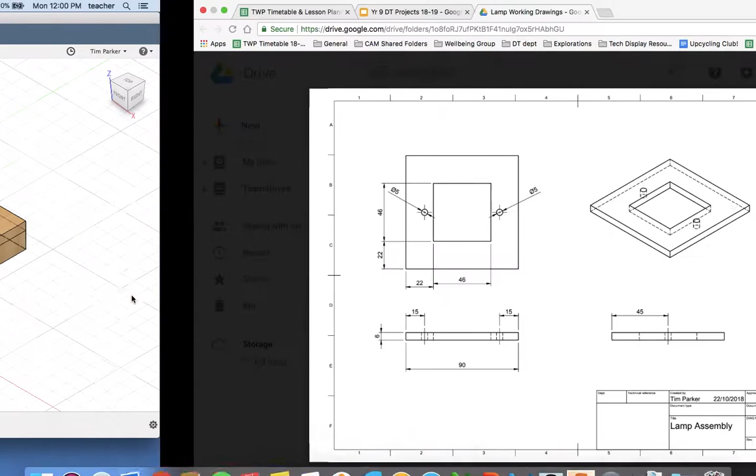So the second last part that we still need to make is the acrylic with a square hole in it. This is the bit that's going to go over the top of the circuit board and let the LED light shine through. For this one, we're doing the same as before, but instead of a circle in the middle, it's a square in the middle.

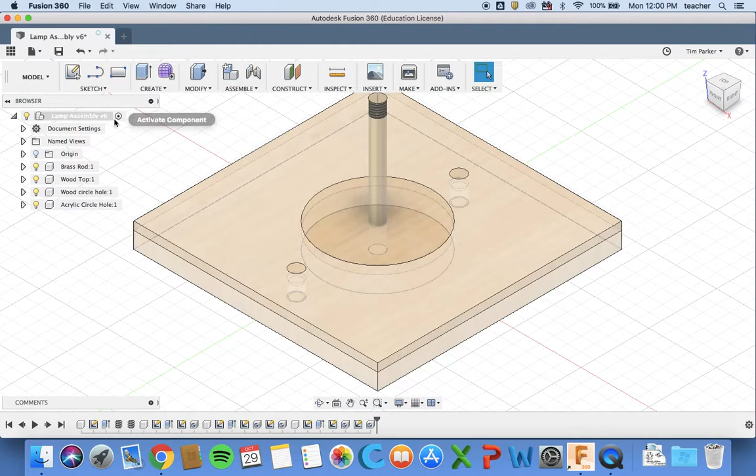So I'm going to make sure I've got my assembly at the top as my active component. I'm going to create a new component, and I'm going to call this acrylic square hole. I'm just going to turn off my other ones so that I don't have to see them. I'm going to create a sketch.

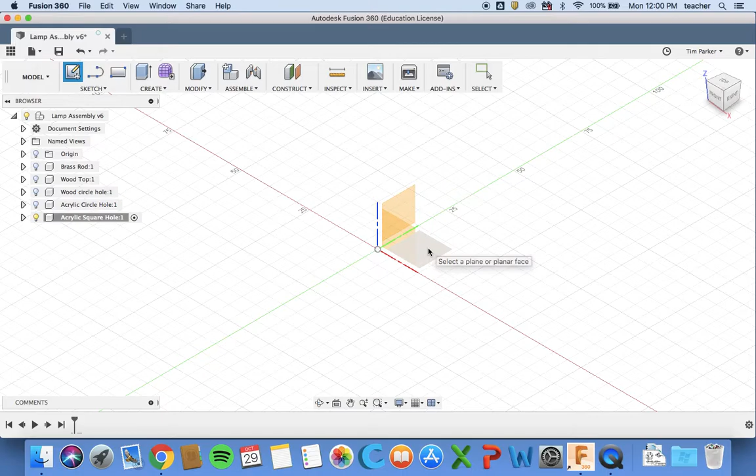So, same drill as before. Okay, I've made my sketch. Now I need to create my rectangle, so center rectangle.

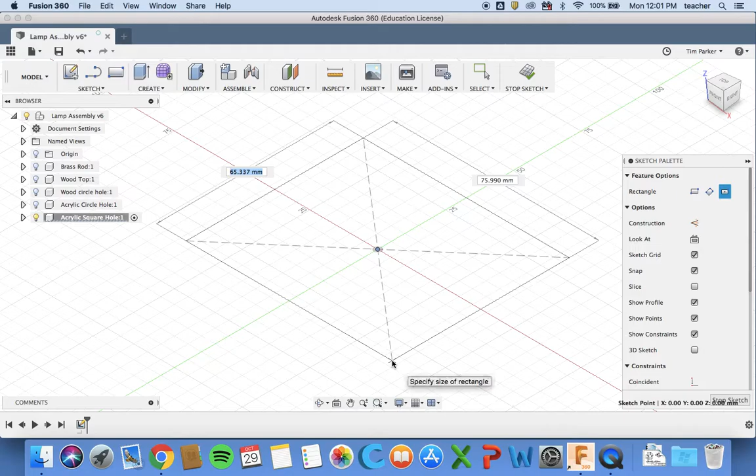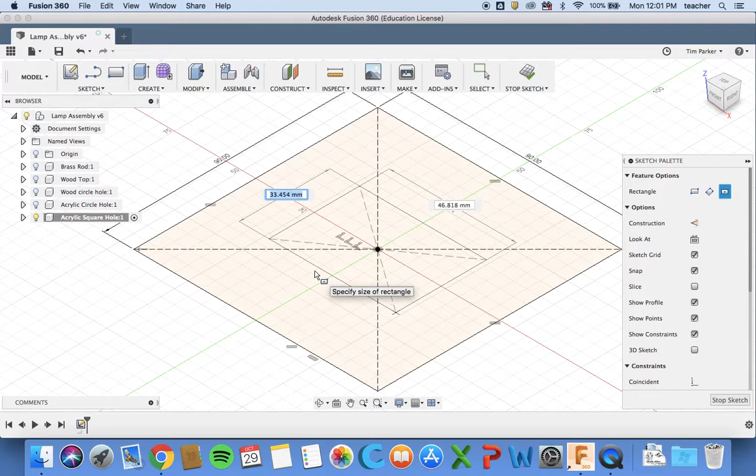This is the point when you can either draw your rectangle in the middle in the sketch, or you can do it afterwards. I'm going to do it this time in the sketch before we extrude. So again, we click rectangle, center rectangle, and if we have a look at the dimensions, it is 46 millimeters by 46 millimeters from the center. So 46 by 46, enter, stop sketch.

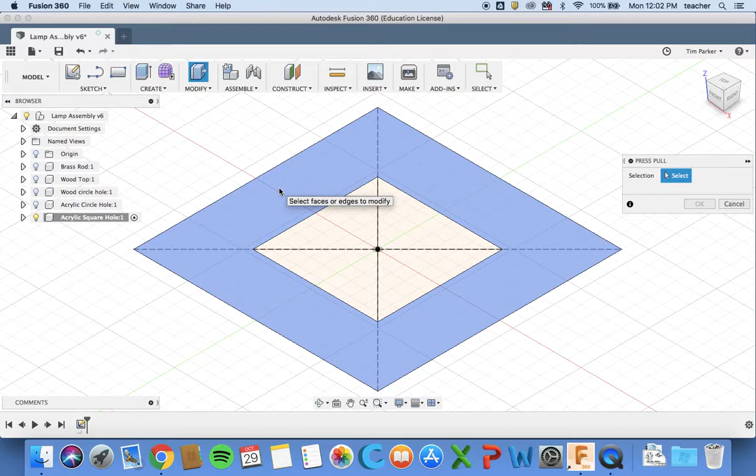Now what you'll have is you've got this outer area and an inner area. So we only want to extrude the outer area. For that we go to press-pull, select just the outer area, and we're going to move that up by 6 millimeters thickness. That means we don't have to cut it out as a second operation.

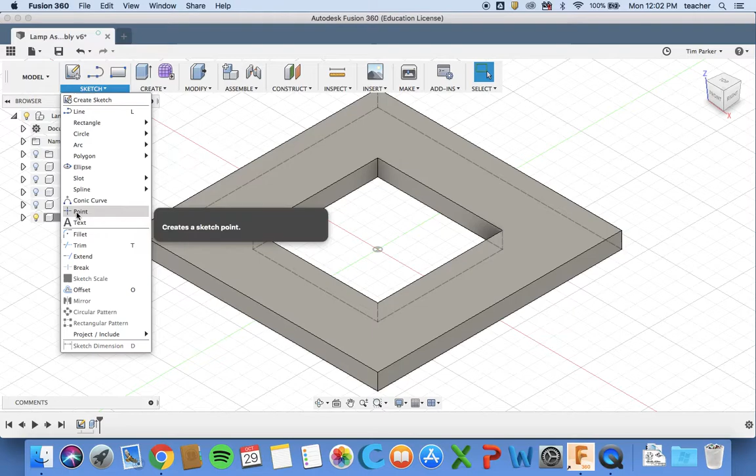We do still need to put in our 2 holes for our brass rods, same as before. I'm just going to turn on my one from underneath to double check it's going to be on the right plane, so over here and over here. Again, we're going to click sketch point. These are going the whole way through, so we can just choose the top of this. I'm just going to put it there and here.

I'm going to do my sketch dimension, just double check and put those in the right place. So that should be 15, 15 from the edge for this one. 15 from the edge. And then 45 from the bottom or the top, doesn't matter which. Same with this one, 45 from the bottom.

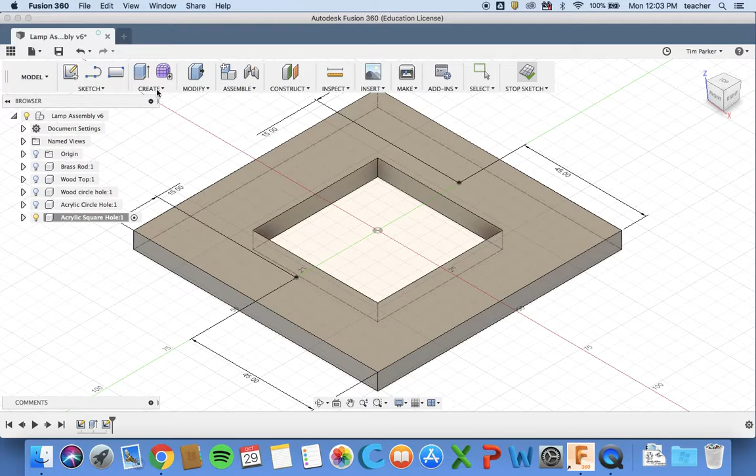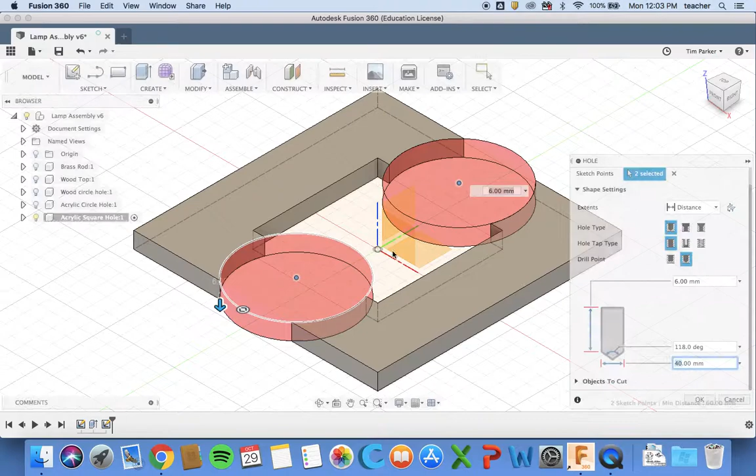Okay, I can stop my sketch. And now I'm going to create my 2 holes. So I select my point, or my other point. Now I need to adjust this, so the 6 millimeter depth is correct, it's just the diameter we need to change. If we go back to here, it should be diameter 5 millimeters so that it slides on nice and easily. So I change that to 5, and we don't want a tapped hole, so a simple hole is fine. And that's all of that made.

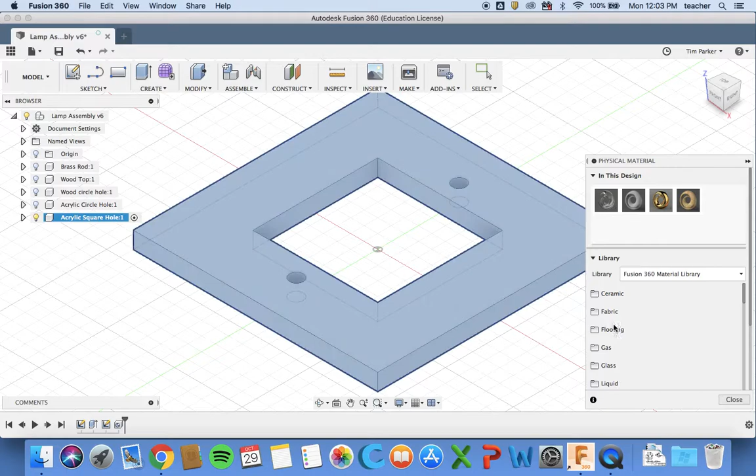The last bit is just to make it acrylic. So again, we right click, physical material, and we're going to find our plastic acrylic clear, drag that on, close that, and then click save. And that's another component made. So I go back and select, activate my whole assembly.